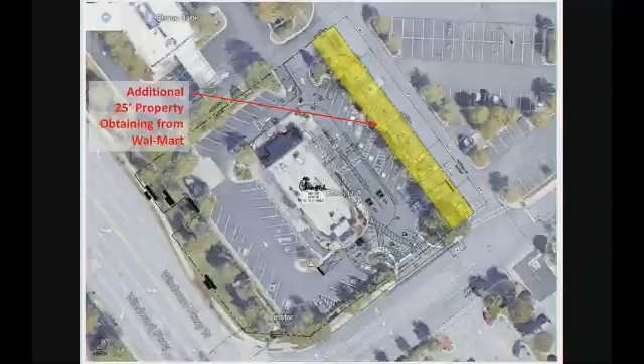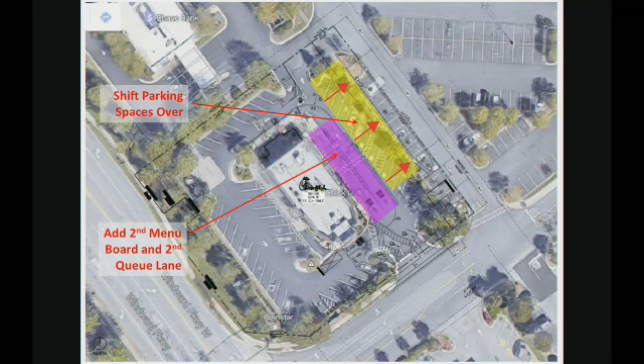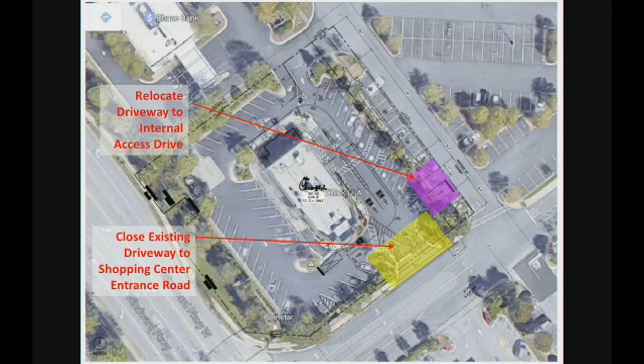So the first thing we're going to do, we've talked to Walmart, and we'll be obtaining 25 feet of property from them. That will give us the opportunity to shift our parking spaces over to give us more room up against the building to add that second queue lane and the second menu board. We're also going to close the driveway that opens out onto the shopping center entrance road and relocate that around the side so that it now accesses the internal shopping center instead of the main entrance to the shopping center.

Okay, we're also going to push the curb out 3 feet on the entrance side. That'll give us a little bit more room so we can provide a 10-foot drive against the building and then still have almost a 13-foot bypass at the front of the building, where it's the tightest circulation that we have.

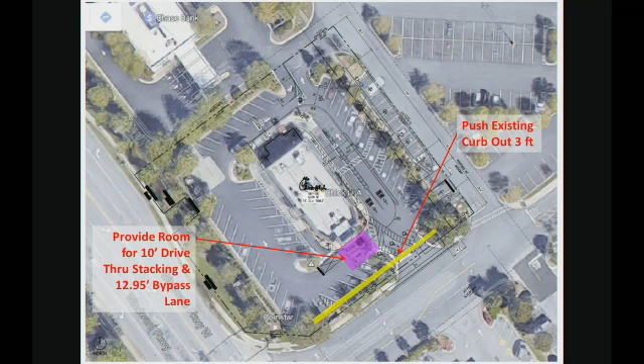Here's the idea of what's going to happen now that we're making these changes. Cars will be forced to come in from the shopping center or from the Chase Bank driveway. We're going to install a drive-through lane separator, highlighted there in yellow. That will allow everyone to circle the building to get in line with the drive-through. That way, stacking will now back up around the building. We've got one-way circulation, and I think that'll improve the way that cars get into the site, on site. And then the red arrows show the exit pattern, how they would head back out after getting their food.

We're also going to be relocating the handicap spaces. Right now they would cross over two drive-through lanes, so we're going to push them to the front of the building so they only have to cross where the drive-through lane is only one lane wide.

Now on to the building. We're in the Deerfield Highway 9 area of town. I included this because I wanted to point out that Family Care Urgent Care Center has those black awnings over the windows, and that's something we're looking to incorporate very similar to what they did there. We're in the Zone T5 area.

The modifications to the building: we're looking to add 452 square feet to expand the kitchen and the service yard to provide faster drive-through service, install an order canopy to protect customers and team members from the elements for face-to-face ordering, and also install black canopies for the doors, windows, and rear facade faux windows.

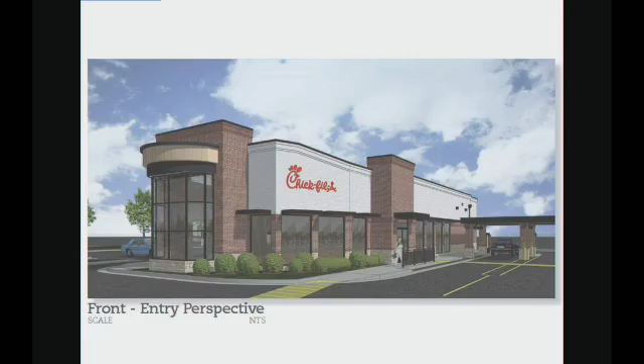Here's what the new elevations are going to look like. We're going to pull off that channeling and put the black awnings over the windows, cleaning it up with a little more modern look. It kind of looks like what I showed you at the beginning, on the cover of your code book, that they did at the urgent care.

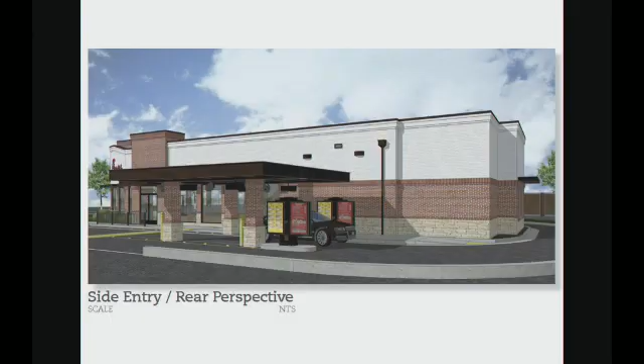You can see to the right, that's the canopy that's going to be over the ordering area. There's a side entry perspective. Here's the menu boards at the front of the canopy. Another view of the canopy we're proposing, again similar to the industrial style appearance of that urgent care center we saw in the code. And then here's the rear with some faux window treatment and the awnings over it.

And then onto the drive-through pickup side, again around to the front. So that concludes my presentation.

I have representatives from Chick-fil-A here with me to answer questions you may have. We can go back through some of those images.

I am one of your strongest supporters in terms of customers. I come to the store probably three times a week. So I appreciate you trying to improve the traffic.

But one thing I want to ask: has anybody done a traffic study or accounted for the true traffic pattern at that particular intersection with McDonald's? Because McDonald's wanted to do the same thing, they wanted to double up their line. We certainly had comment about it. For whatever reason it just hasn't happened yet, because they just don't have much space like you do.

We feel, I mean, I don't know all the details about the McDonald's, but I believe their menu boards were visible from the street, whereas ours are behind the building, on the back side. It's not visible from the street.

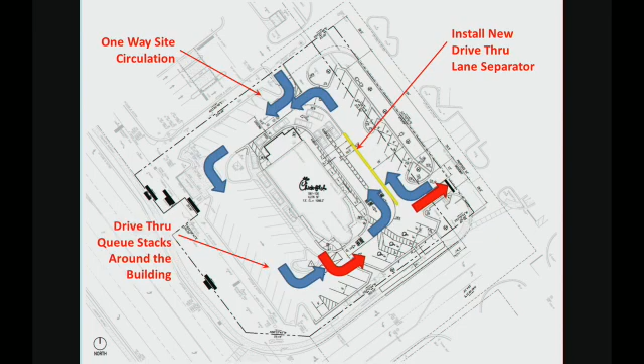So let's talk about architecture. Bob, you had some thoughts? Yeah, I was actually going to ask to have the application deferred till next month so we can work with the applicant more on the architecture. We really need to incorporate more detail onto this. The windows in the back need to be more window-oriented, not bricks.

Because the code requires so much glazing every so many feet—I can quote the sections. The awning needs to have pitch to it somehow, and the code requires that it's pitched, meaning it has some sort of a roof to it. So we need to look at that.

I did ask the applicant to show, if we were to take the parapet style and attach it and wrap it around, how it would look, and this isn't really doing that either. So I think we need a little bit more time.

So let me ask the applicant to really explore this and get it right. If we were to say we'd give an approval to what they want, subject to your review of the items you've got, and you're approving them—no, I'd rather make sure that the board sees the final plan and gets it approved.

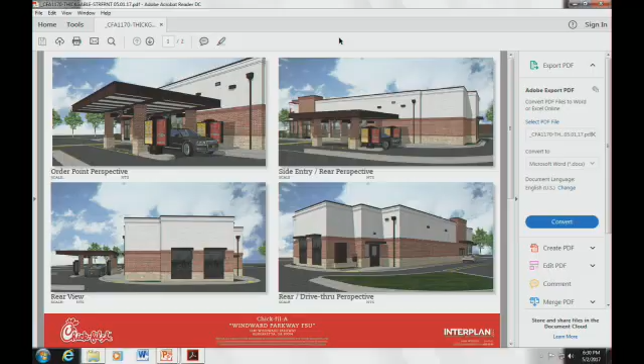Hold on, I'll get it on there. Learning as we go, okay. Are you on? Yes. You seeing it? Okay, good.

So this shows the spandrel glass windows with the awnings. Just move your mouse here.

Can I ask you a question? On the drive-through, if we're looking for a pitched roof, could it just be a pitched parapet that looks like a roof, going all the way around it?

Well, I've got to incorporate it into the building. I think we can get away with more of a parapet style, so it looks like an extension to the building. You're talking about like the parapet at the top of the building, free floating? I think having a real pitch on the roof would make it look more residential.

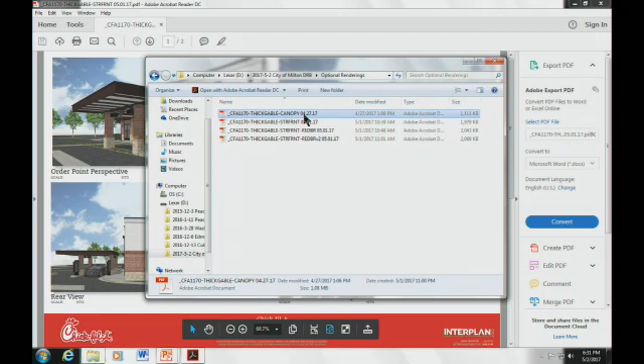What would this be what you're talking about? This is another option we showed that had a gable on top with spandrel glass in the back. That looks awful.

Personally, I think it would look better if we used a matching parapet that extends the building. And personally, I'd like to see it attached to the building. If it was attached and came around, it would look like the same parapet, even though lower than the original, and would look like an addition that was incorporated into the architecture from day one.

Do they have that on the new store over on Avalon? Do they have it on that one? They have them, but they don't have a canopy over it. That store is very custom to what the DRB and Alpharetta wanted, which was totally different from their standard, and it took many iterations to go back and forth to get that store.

So the entrance to the restaurant itself is just for this canopy, correct? It's right here. So if your roof covered the sidewalk going to your front door, that'd actually be a nice look, wouldn't it? It would look like the same parapet with the same coverage and detail.

But it would be lower. It would just look like that addition was a little lower, about 3 feet high, coming around and wrapping around, touching the building, so it just looked like the addition was lower, same color as the building, same top detail.

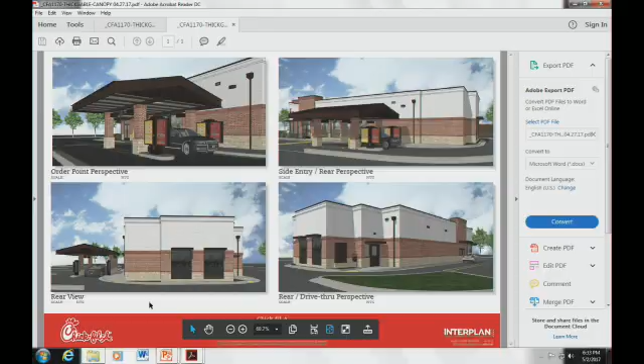So when the truck comes, they'll send an employee out and carry an umbrella. Man, I have to walk from Walmart and get wet.

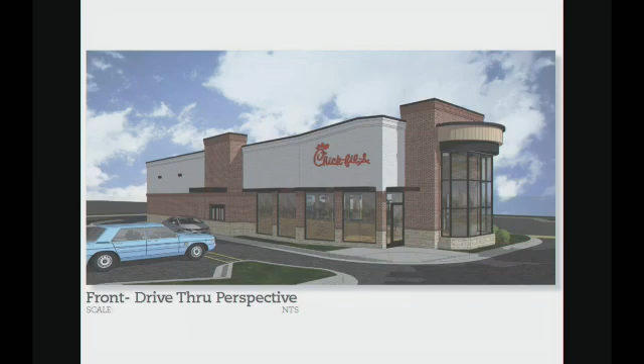And the windows in the rear, if they could be spandrel, I'd make them a little smaller than the awning. You don't have to go all the way down to the floor. They would just look like maybe up to the band, just to give it a relief there. It doesn't have to be quite as big. We can switch that up too, actually make them smaller and make them work.

The only concern I've got about making it attached to the building - I like the look of the roof. It doesn't serve any functional purpose for keeping dry, because you still walk back in the rain, but it would look like it was integrated with the architecture from day one. It would look like one big piece, and then it just kind of steps out.

Isn't that top of that building stucco, and that looks like it's brick? It is stucco. Okay, so this is the brick rendition, correct? That's correct.

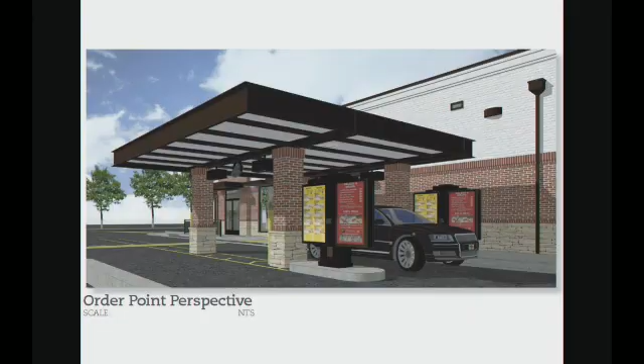Actually, it does look like it's brick. I think it is brick. It's painted brick, I think it's painted. I'm thinking of Zaxby's. I like the white painted brick for what it's worth. I do too, but that building's not painted brick, so it's just a lighter brick.

The only thing I would consider - I know other folks have thoughts - are on those awnings on the front, over the door. If you recall, the north side, or the hospital, whatever it was, had little ties coming off the roof. I think those ties back, not over every single window, just over the doors, would be a nice look. I think that would be better looking. Okay, so tiebacks for that, connect the awning to the building and make it 3 feet tall.

I think 3 feet might be good. What color would you want the awning to be? We'd want the awning to match the building color. Match the building awnings or the building color? The light color of it - you have the very top of the parapet, the brown or black or whatever that is. Yes.

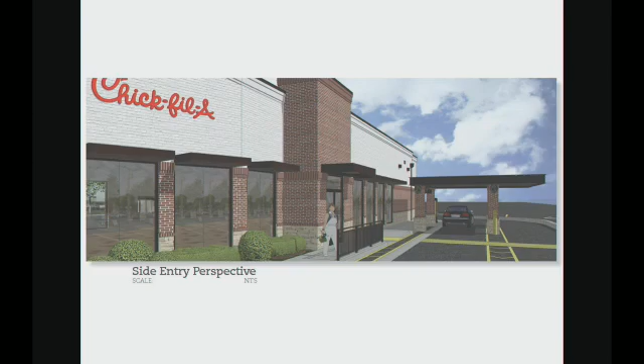And then what's the comment about the spandrel glass on the back? I think we can work together and just reduce the size of it, making it a little bit smaller, just to give it a relief. It doesn't have to go all the way down to the floor.

You guys aren't re-bricking this whole building, are you? We're not, it's just a building addition that we're going to try to match the finishes that are on the existing building.

So right now there's like an AC or a refrigerator back there. Is that all going to be enclosed? Yeah, so this will be a building addition that will have a freezer, a cooler, an office, and dry storage. So all that stuff that's back there right now is basically going to be internal. Right. Okay, can I make another comment? Sure.

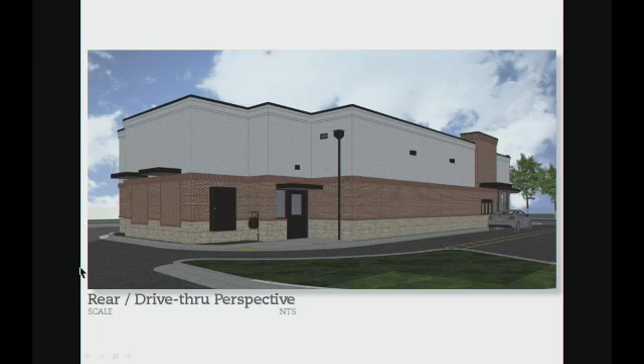You get wet at the drive-through window, if it's raining hard. Yeah, we're gonna have a new awning there too. So all the awnings in the building will be new, including the ones we added over the back door and other places. There's nothing worse than Marty's chicken being soggy in the morning with the rain.

So basically the conversation we've had here today is to incorporate those changes and work with the city architect to ensure that everything's done, and then come back one more time. Is that something that's amenable to you guys? If we have to, yeah.

I would rather not, because one of the things we've been trying to do is this restaurant has needed this remodel for a really long time. If we have to wait a month to come back, the way the permitting process works, we probably won't be able to get it done this year, so we'll move into next year. We're really hoping to get it started in September.

So let me ask you this - if we defer this and agree to a special call meeting for you, would that be acceptable? In other words, that gives you the opportunity to get back with Carter, because the applicant still has to go through the concept review and get approval from all the directors and whatnot.

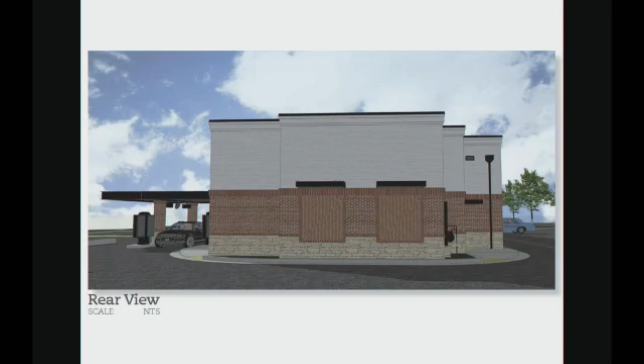I did want to ask, this plan doesn't show what the old plan had, a connection to the Walmart parking lot. There's a lot of people parked there, honestly, and they just can't walk over. We don't have any sort of cross connection. I was wondering if there would be a cross connection?

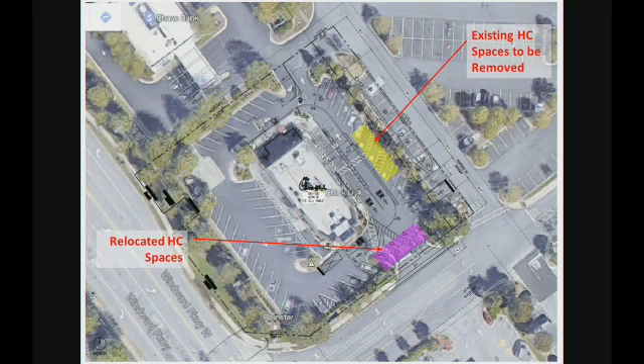We're taking out those parking spaces, so we didn't want to encourage people walking over to Walmart. So I don't know, how does the board feel about that?

I know a lot of people do. I'm confused at what you're talking about, Bob. I'm not sure. What he's talking about is a walking path going across the access road.

We don't have any legal right to use their parking spaces, so I think it's kind of an unofficial walkway, and they don't have one now. A lot of people park here even though they shouldn't, and they do cut through here to get to the store. I'm still going to park at Walmart. Yeah, I don't think it matters one way or the other.

You have a great restaurant. My daughter works there. I like your employees. Yeah, happy with that restaurant every day.

Well, I mean, so I think we know what we're doing here. I will say, Bob, to the extent possible, let's try to move this along and make sure it's aligned. I think we want to be respectful of businesses that are investing in our community, hiring employees, paying sales taxes, etc., because obviously this is an important Chick-fil-A. They do a lot of business there, reinvesting in traffic, but let's see if we can move folks along and get them through as quickly as possible.